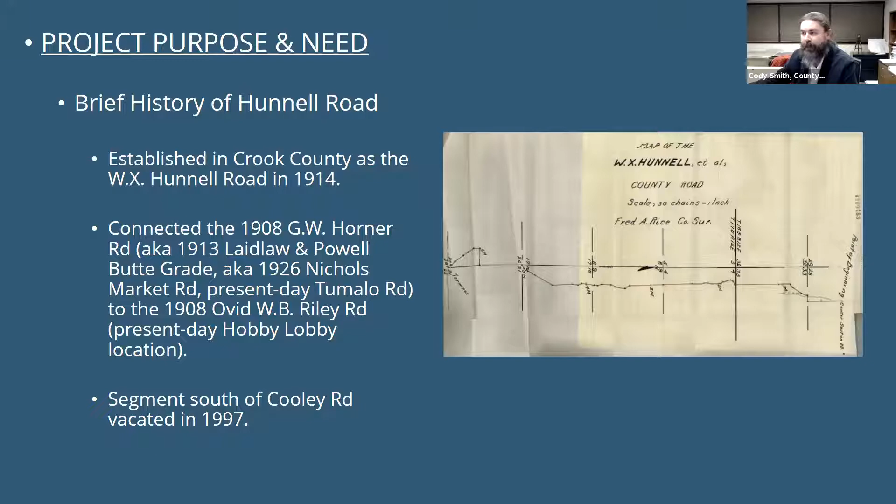From our road records and also from scouring our county commissioner journals, over the period between 1972 and 2005, the county received numerous requests and petitions from residents and property owners on Hunnell Road to improve that road.

Some examples: in 1972, some residents petitioned the county to pave the 0.2 mile segment south of Tumalo Road, work that actually did occur. In 1981, residents petitioned the county to improve Hunnell Road to county specifications between Rogers Road and 0.6 mile north of Rogers Road.

In 1983, the Board of County Commissioners actually contemplated forming a local improvement district to improve Hunnell Road, which would put an assessment on all the properties along Hunnell Road to pay for improving the road. That plan was scrapped due to the cost of the project and the impact on those property owners.

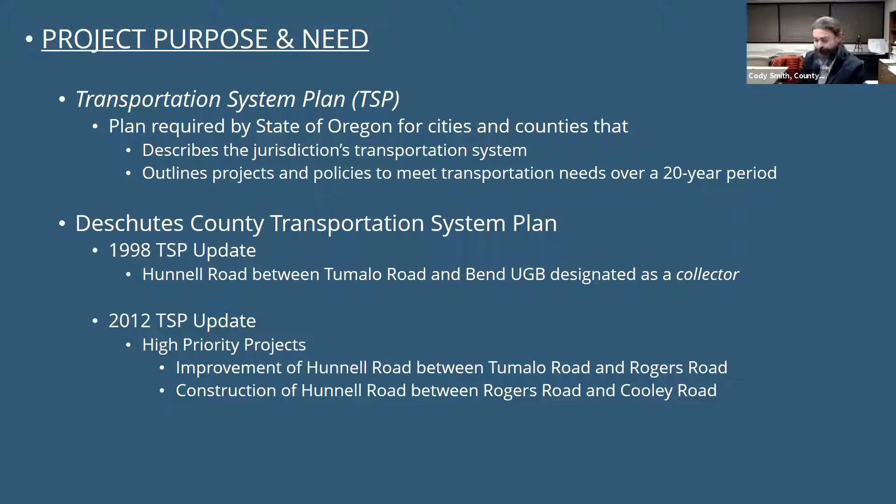The City of Bend, in their most recent transportation system plan, also identified some projects related to Hunnell Road. In the city's 2020 TSP update, Hunnell Road between Loco Road and the UGB has been designated as a collector road. Again, we'll talk about that term more in a minute.

In their plan, they've identified three expansion-driven projects for improvement to Hunnell Road. The first is the Hunnell Road extension, a project to construct a 2-lane north-south collector roadway between Loco Road and the UGB boundary, which essentially would be part of our project that we're presenting tonight.

The second project was the Hunnell Road Rural Road Upgrade and Realignment Project, which will include realigning Hunnell Road south of Loco Road along an S-shaped alignment so that it intersects with Cooley Road where Hunnell Road south of Cooley Road currently intersects near the Les Schwab Tire Center on Cooley Road. Lastly, there's a roundabout project at that intersection.

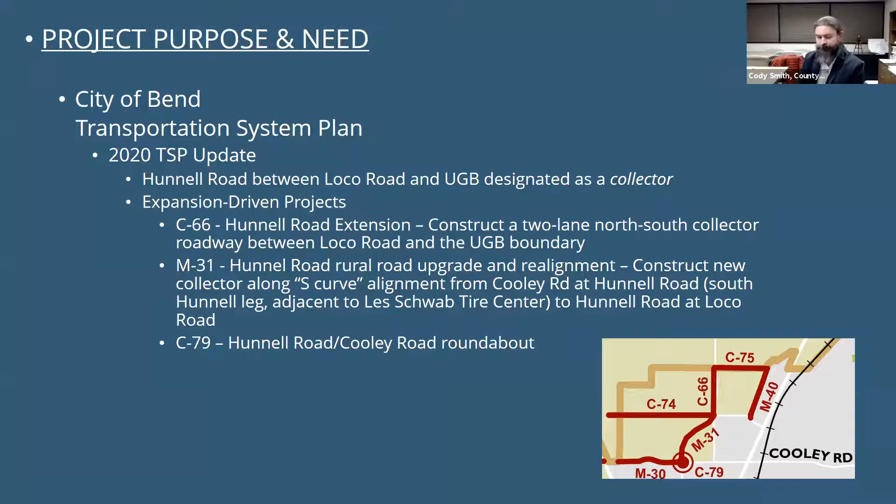All right, so let's talk a little bit about the term collector road and what that means. We'll talk about it generally, and then as it pertains to Hunnell.

The purpose of a collector road is to distribute traffic from lower functional class roads, like the local roads and streets some of you live on, to higher functional class roads, arterial roads, and principal highways. It provides for circulation in residential neighborhoods, getting from one part of a larger neighborhood or area to another, and provides a blend of access and mobility. Collectors serve longer trip-making capabilities but can also provide direct access to abutting properties, like driveways.

Collectors are generally spaced at intervals to collect traffic from local roads and provide all developed areas a reasonable distance from a collector road. It's part of a system, a network of local roads to collector roads to arterial roads to principal highways and so on. Collector roads typically terminate at intersections with other collector roads or higher order roads like arterials and principal highways.

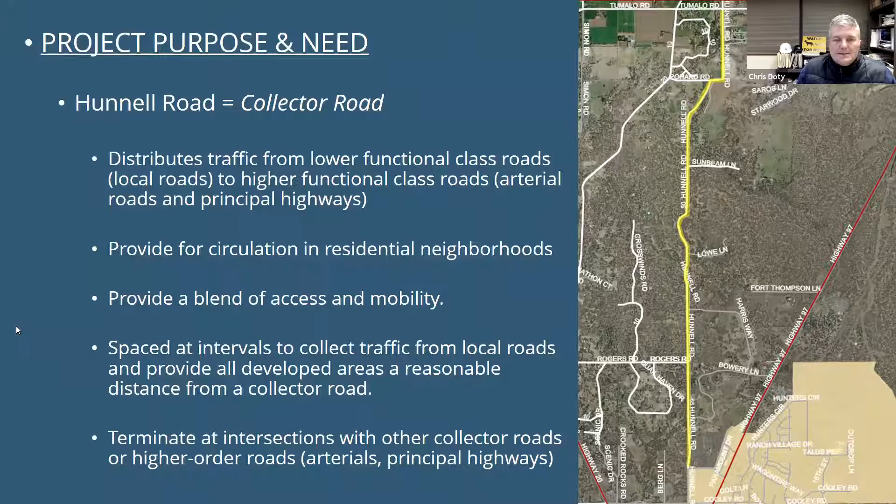Specific to Hunnell Road, it will collect traffic from a variety of local roads: Bowery Lane, Lowe Lane, Sunbeam Lane, Pohaku Road, and Mitchell Lane, and also provide access to adjacent properties.

It then collects that traffic and distributes it to principal highways such as US 97 via Tumalo Road, or arterial roads such as Cooley Road, and the Old Bend Redmond Highway via Rogers Road and also via Tumalo Road. This segment of Hunnell serves approximately 110 properties in the general travel shed.

The current volume of Hunnell Road—we've really only measured it in one location historically—is approximately 400 vehicles per day, measured south of Tumalo Road.

As far as future projections go, what do we anticipate the volumes to be on Hunnell Road in the future? The tool we've relied on is the Bend Metropolitan Planning Organization's traffic model, in conjunction with the Oregon Department of Transportation's Transportation Planning and Analysis team in Salem. That model projects significant growth based on zoning, types of land use, and the type of system that could be in place to serve that land use. It's a 2040 projection.

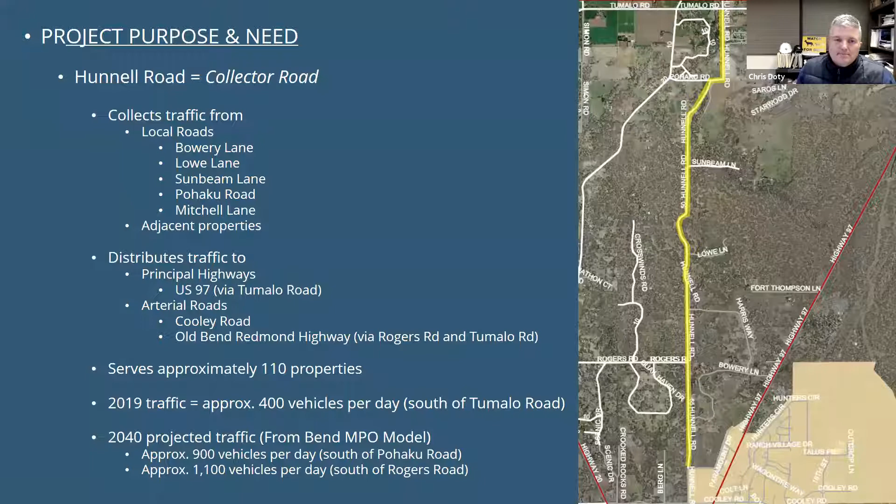I want to talk briefly about the current conditions on Hunnell Road. First we'll look at the segment between Loco Road and Rogers Road, about a 7/10 of a mile long segment. Presently, this piece of road is mostly just an unimproved dirt road. In particular, the portion between Bowery Lane and Loco Road is very primitive, only passable generally by high clearance vehicles, with a lot of rock outcroppings on that section.

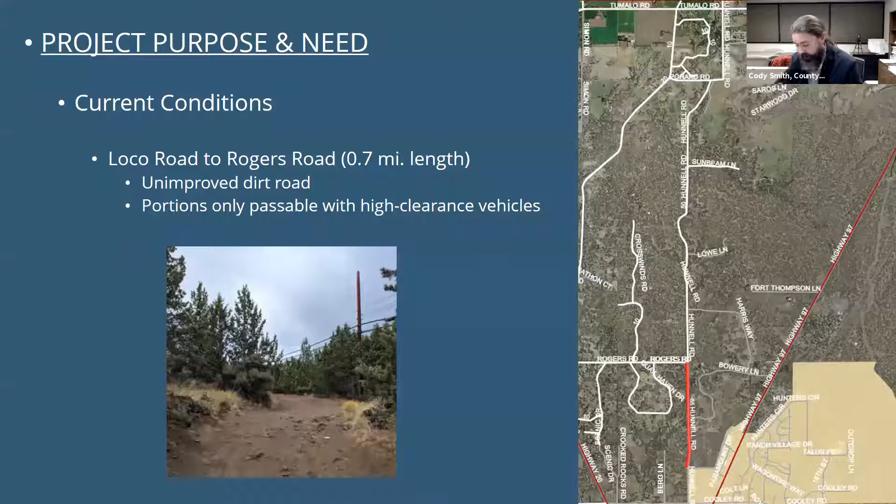Then there's the section between Rogers Road and Tumalo Road, about a 2.6 mile length segment. This section has various levels of improvement and connectivity. There's a portion that is paved—it was actually paved by a private party some years ago without a permit or any blessing from the county to do that. But nonetheless, there is some pavement on the road.

One of the deficiencies on the road is some sharp curves included in the alignment, particularly those two reversing curves near the Pohaku Road intersection, and also the curve south of Sunbeam Lane, where the road goes around the hill. There are a couple of pictures of those locations.

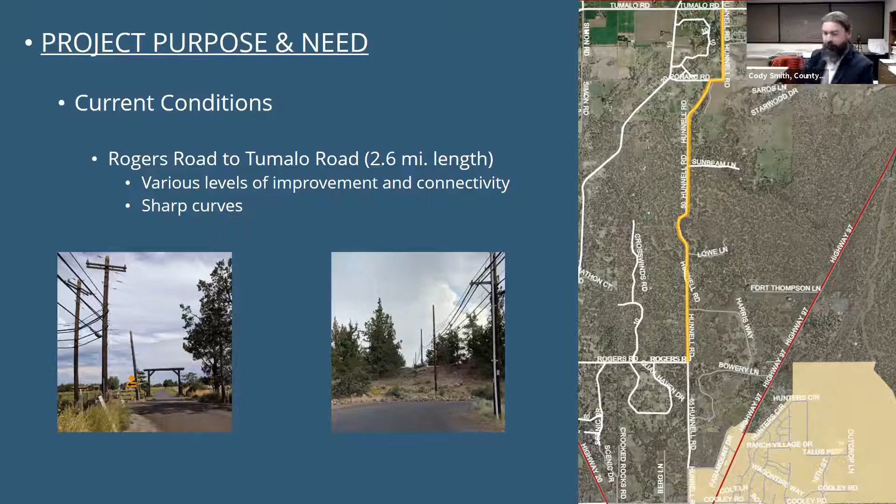As far as crash history on the road, when we look at crash history for a road project, we're usually looking at the most recent 5-year period with available crash data. That period for us is between 2014 and 2018. During that period we had 4 reported crashes. We assume there are probably several more than this, but as far as actual reported crashes submitted to DMV, this is what we have on record.

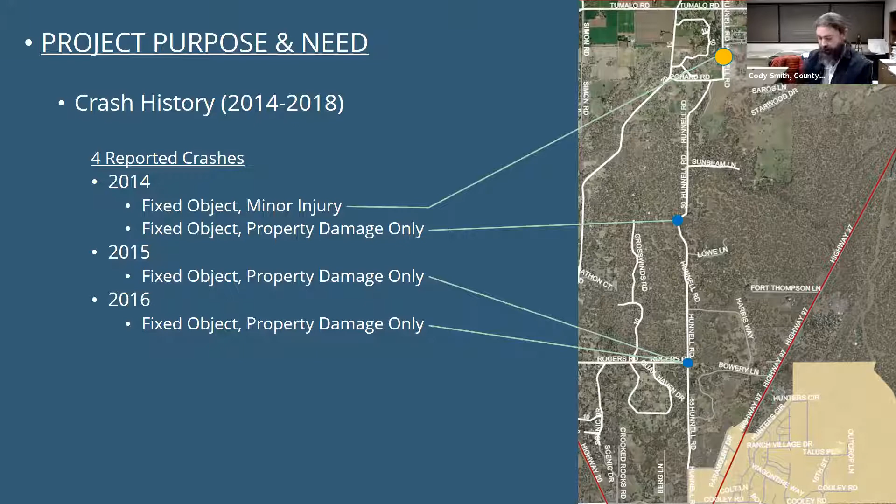In 2014, there was a minor injury crash reported just south of Tumalo Road, and also a property damage only crash in that curve south of Sunbeam Lane. Then in 2015 and 2016, both years had property damage only crashes at the intersection with Rogers Road. All these were fixed object crashes, generally roadway departure crashes—vehicles leaving the travel roadway and hitting a fixed object such as a tree, rock, fence post, or something else on the roadside shoulder.

All right, so in terms of the scope of work, what are we after with this project? What are we endeavoring to design and construct?

We'll be constructing and improving the roadway to meet minimum collector road standards regarding roadway geometry, correcting some of the deficiencies Cody just mentioned, and implementing traffic calming measures to reduce speed and maintain community livability.

We'll talk a bit more about the input we've had from folks in the area and how we're trying to incorporate that into the design of Hunnell, in recognition of its unique status as a very valued neighborhood. We'll also be improving intersection safety through the corridor, with a brand new corridor featuring good intersection sight distance and safety attributes.

This next bullet is improving access for emergency services—connecting parts of the system that haven't historically been linked. And finally, removing roadside hazards through this project, addressing some of those things that contributed to crashes that Cody just noted.

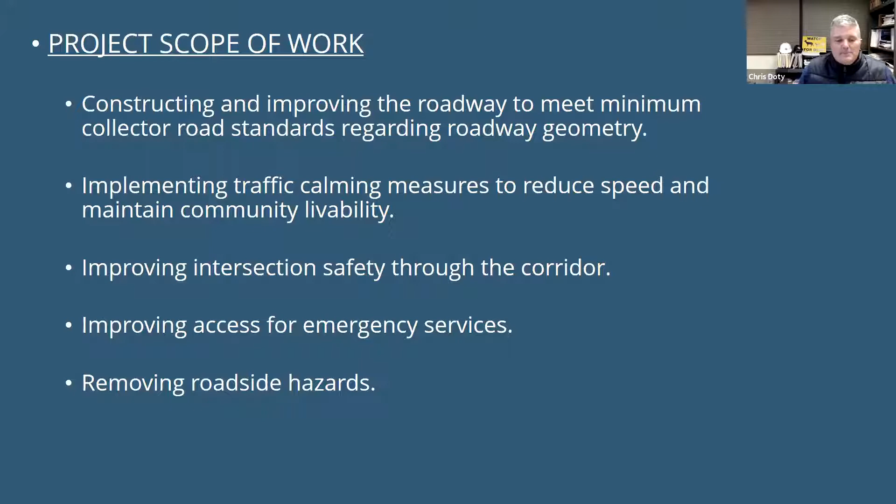So, efforts to date—let me walk you through how we got here in recent time frames. As we mentioned earlier, the 2012 TSP identified Hunnell Road as a project and a high priority. Back then, the hierarchy of projects was ranked and it was determined to be high priority, but we didn't have a lot of money back in 2012.

That changed quite a bit in 2017 with passage of House Bill 2017 through the state legislature, which increased the state gas tax and really benefited Deschutes County by expanding and capitalizing our capital program. We now have money to make improvements in our system that we historically haven't had, and we'll talk about some of the projects you've hopefully seen in and around your area.

In 2019, ODOT made an effort to put forth an application for an INFRA grant—a large federal program that funds large-scale projects, very competitive, with very few projects awarded. As part of that application, the county put forth Hunnell Road as a supplemental project, to show the amount of investment local government will be making in the transportation system around the north end of Bend, which is what that INFRA grant was intended to help fund.

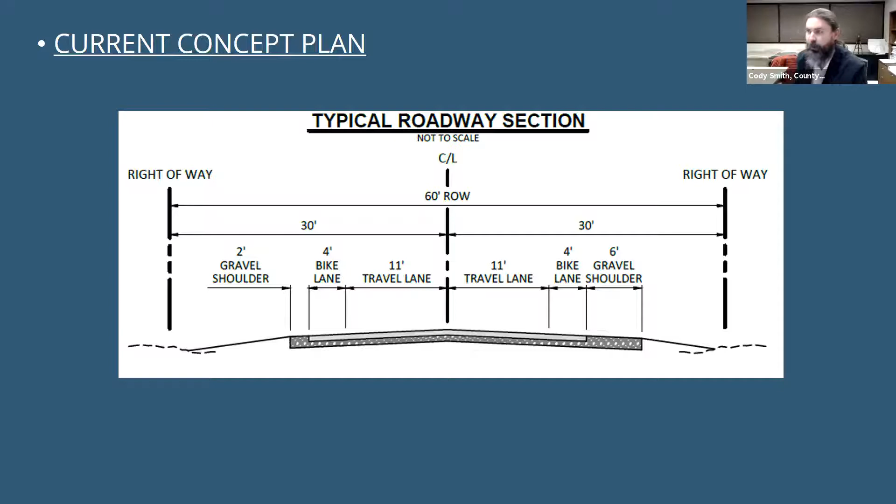So looking at our roadway alignment, we'll start at the north end of the road here. Generally, this project follows the existing alignment of Hunnell Road and within that existing right-of-way, with just a couple notable exceptions. One of those being right adjacent to the intersection with Pohaku Road.

So with this project, what we're proposing to make the Pohaku Road a more functional intersection, and also to alleviate the safety concerns with those two really sharp curves in the Hunnell alignment right there, is basically flattening these curves to move that alignment for Hunnell Road a little bit to the east. So with this, Pohaku Road intersects Hunnell Road at a T intersection.

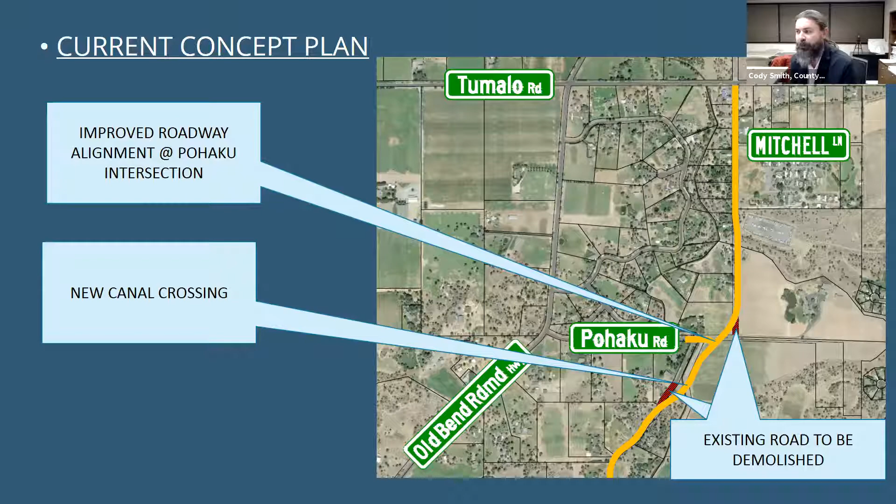With this, we'd be putting in a new canal crossing. Where we're showing that canal crossing right now is basically where we can attack the canal at the least amount of skew to reduce the amount of structure that we have to build over the canal.

Moving south here, for the most part we're generally following the same road alignment with that new section shown on the previous slide. We get down to this curve around the hill south of Sunbeam Lane, and at the north end of that curve we're proposing some realignment to flatten that curve.

With all the curvature on the road here, we're using a design speed of 35 miles per hour, so curves can safely be navigated at that speed. Our intent with this project is also to post a speed limit of 35 miles per hour on Hunnell Road. Presently there is no posted speed limit on Hunnell Road - the actual speed limit based on state law is 55 miles per hour. So with this project, we'd actually be reducing the speed limit on the road.

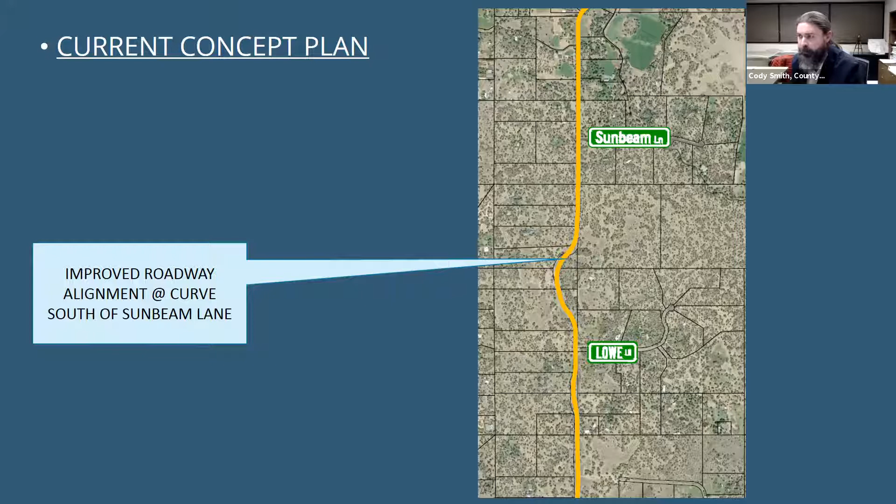Continuing south, we get down to the intersection with Rogers Road, and we're proposing making that intersection a 4-way stop. Rogers Road also being a collector road, under the Manual of Uniform Traffic Control Devices standards, it allows for us to do that. An inherent benefit, although not the intent, is that it does provide some level of traffic calming, slowing people down so they have to stop and navigate the intersection.

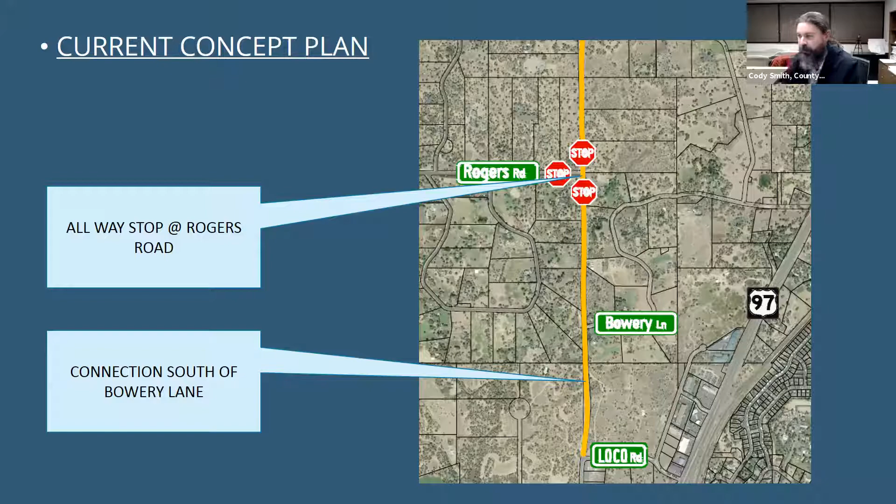Continuing south, lastly the segment south of Bowery Lane down to Loco Road, completing that connection. The current goat path that exists there right now, a lot of that is actually outside of the dedicated right-of-way. So with this project, we'd be constructing the road within the established public right-of-way.

Next I want to talk about some of the traffic calming elements we're proposing adding to the project. In general, traffic calming is introducing features to slow traffic down and give strong indicators that they're traveling through an area where they need to watch their speed, signifying that this is an area where people live.

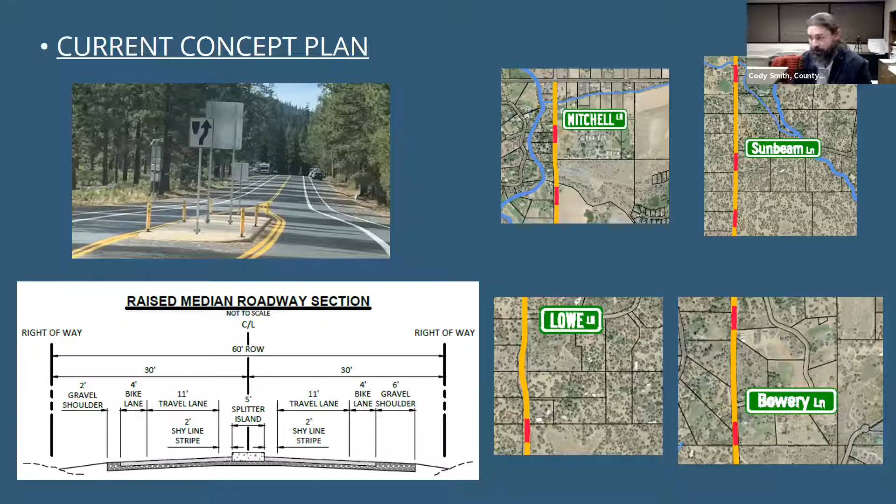A couple other traffic calming elements we're proposing with this project: one is introducing dynamic speed feedback warning signs. Many of you have probably seen these - speed posting signs coupled with a radar-activated display that shows people how fast they're driving. Speed posting signs work best when coupled with a police car sitting there to enforce that speed, but recognizing we don't have that everywhere all the time, the next best thing in our toolbox is these dynamic speed feedback units that show people how fast they're driving and give them an indication if they need to slow down. We're implementing these more and more in our road system, and they work real well.

With this project right now, we're proposing 8 locations for these signs - 4 in the northbound direction, 4 in the southbound direction. Also, as Chris alluded to earlier, there are concerns regarding commercial truck traffic using Hunnell Road. Another one of our goals with the project is to approach the Board of County Commissioners prior to completion with adopting an order to restrict through truck traffic on this road. Assuming our Board of County Commissioners was agreeable to that, we would post the road for no through trucks prior to completion of the project.

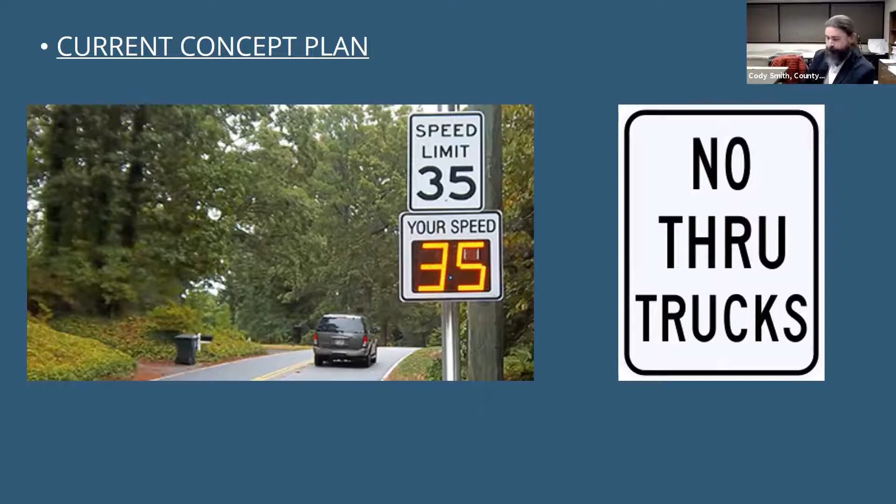All right, back to me. I want to review in tabular format some of the design treatments, a lot of which Cody just talked about, to address the neighborhood concerns we've heard from adjacent neighbors and specifically from the Huns. With regards to speed limit, most county collectors are 45 miles per hour or higher.

In recognition of the fact that this is going through a neighborhood, we've agreed to initially sign this as a 35 mile per hour speed limit, and then accompany that with traffic calming measures that Cody mentioned to really help reinforce that and keep it down.

Much lower, and it loses its efficiency as a collector when people are driving too much slower. 35 mile per hour is probably the low end for a collector roadway speed limit.

As far as road width goes, we're proposing 11-foot travel lanes, that's our minimum standard, and 4-foot bike lanes, also the minimum standard. We had originally proposed 6-foot and then 5-foot bike lanes, but recognizing concerns that wider roads sometimes encourage speeding, we've agreed to propose 4-foot bike lanes. Your input on that would be appreciated as well.

Regarding a place for pedestrians, as shown in the typical section of the roadway, typically we have a 2-foot wide gravel shoulder. What we're proposing is a 6-foot wide gravel shoulder on one side of the road, more accommodating for people who want to walk, potentially ride horses, and stay off the paved way, feeling comfortable doing so.

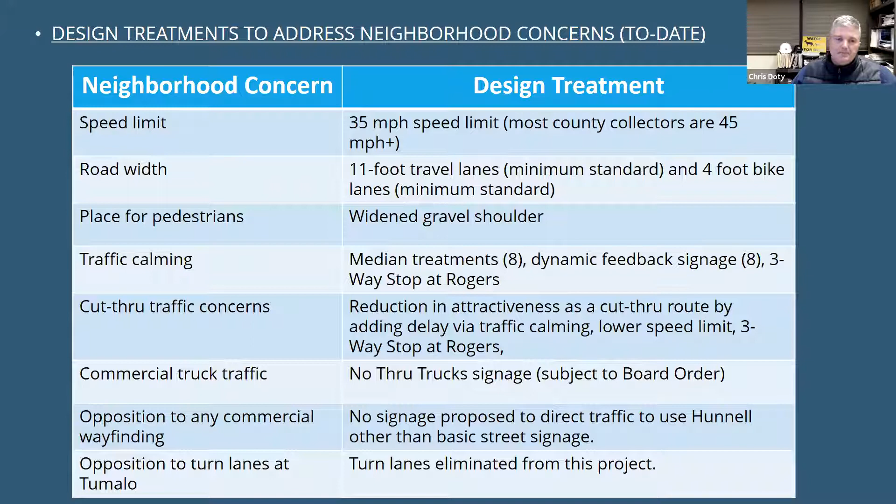We talked previously about other projects in the area and the amount of investment taking place around the north end of Bend and towards Redmond. Hopefully you've all seen the new roundabout at Old Bend Redmond Highway and Tumalo Road—we recently opened that roundabout, part of a series of projects we've been delivering in that South Canal Boulevard, Old Bend Redmond, Deschutes Market corridor.

We've also started construction in the last several weeks on a new roundabout at Tumalo Road and Tumalo Place, the other yellow dot on this map, effectively the off-ramp to Highway 97 at Tumalo Road.

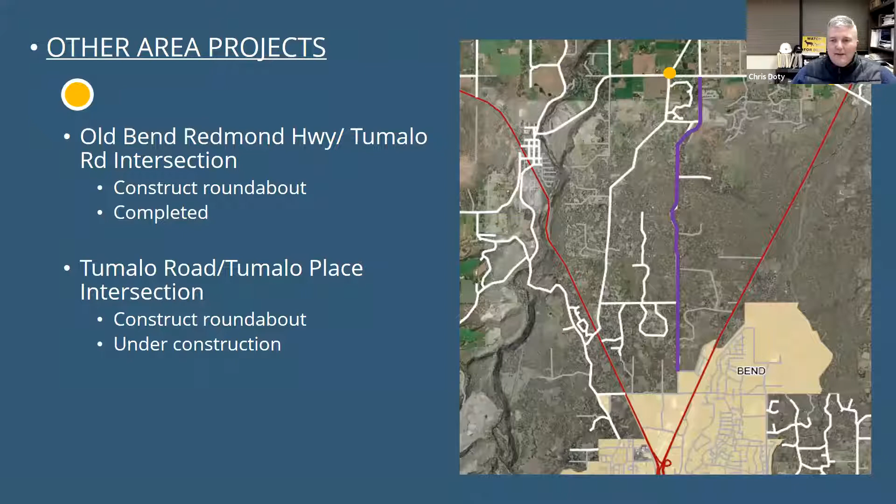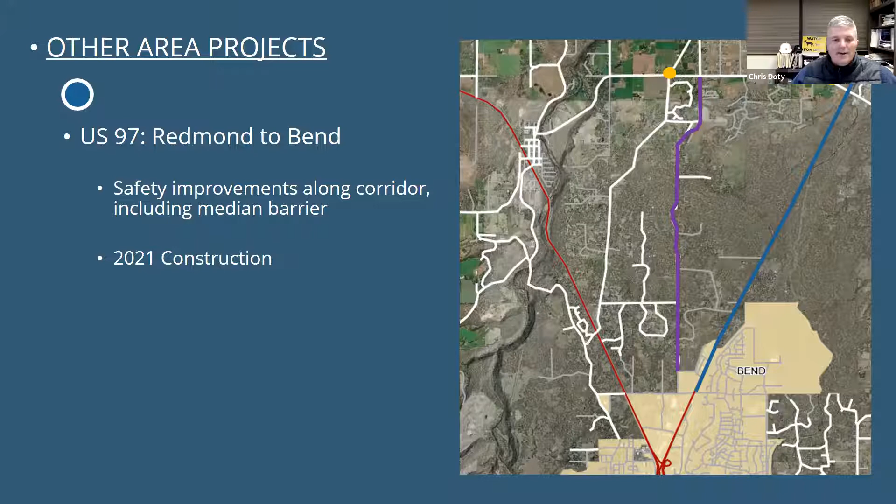Those are county projects. The state will be delivering a project next summer—the US 97 Redmond to Bend project—which adds a lot of safety improvements along that Highway 97 corridor between Bend and Redmond, most notably a median barrier in spots and other safety improvements. That's a 2021 construction project.

I believe there's been a lot of discussion of ODOT's projects. They do a pretty good job of getting the word out and having conversations, just like the ones we're having here tonight. There are a couple other projects on the west side.

ODOT has a US 20 Deschutes River Bridge to Robal Road project they're working on, some of which is in partnership with the county. That will include a new roundabout at the intersection of US 20 and Cook O.B. Riley, right there in Tumalo, primarily funded by the county at that location. They'll be doing pavement improvements from that intersection all the way to Robal Road, and also, probably most importantly to this neighborhood, construction of a roundabout at Old Bend Redmond Highway and US 20 as well. This is pretty significant investment in that corridor.

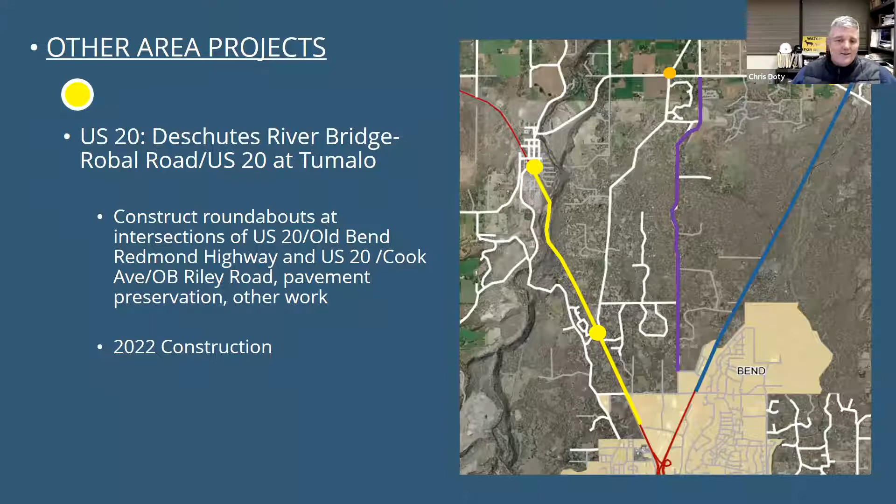I know that roundabout project, or any sort of project to make the intersection of US 20 and Old Bend Redmond safer, is of great importance to the folks listening to us here tonight.

Finally, in terms of transportation, ODOT has the US 97 Bend North Corridor project that will realign US 97 and make other improvements on the north end of Bend, ideally taking traffic signals off that Parkway corridor, which should significantly relieve congestion in the Cooley area. That's a 2022-2023 project, could stretch beyond that. Stay tuned to ODOT as they begin to talk more about that project in the months and years to come.

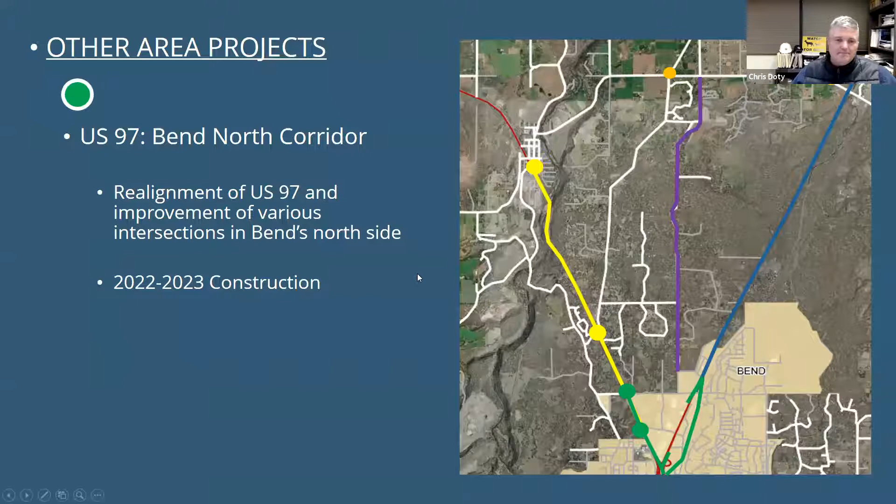Finally, not a transportation project, but one that you'll experience in some form or fashion: the City of Bend is constructing their North Sewer Interceptor project. It's ongoing, but it should be arriving on the north end of Bend to add capacity to Bend's north side. You can see that alignment there in the red dashed line. That is currently under construction, and it should be wrapping up in 2022.

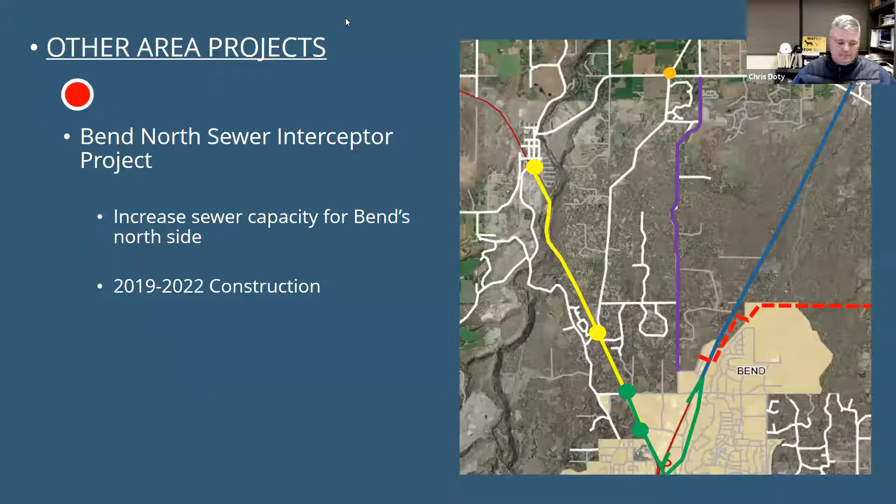We want to take you through our current schedule for our Hunnell Road project. The phase we're in right now is our preliminary engineering phase, which started back in February. We anticipate that to continue through the end of 2021. Presently, with the concept we're presenting tonight, we're at the 30% design stage for this project.

Our intent is, after getting input and comments from folks tonight and after tonight even—right now we're thinking tentatively through February of next year—to take those comments and incorporate them into our final 30% design before we move forward to our construction plans.

We're intending to start a right-of-way acquisition process in April of next year. We anticipate contacting impacted property owners in March with formal notice about that and getting that kicked off with individual property owners. So for those property owners, there'll be much more details to come.

Ultimately we're looking to advertise the project for bids in February of 2022, with construction continuing beginning in the spring of '22 and continuing through the fall of that year. Presently, we're estimating that the project will cost $4.6 million. That's funds we have available in our road capital improvement plan fund, projected through our 5-year CIP period.